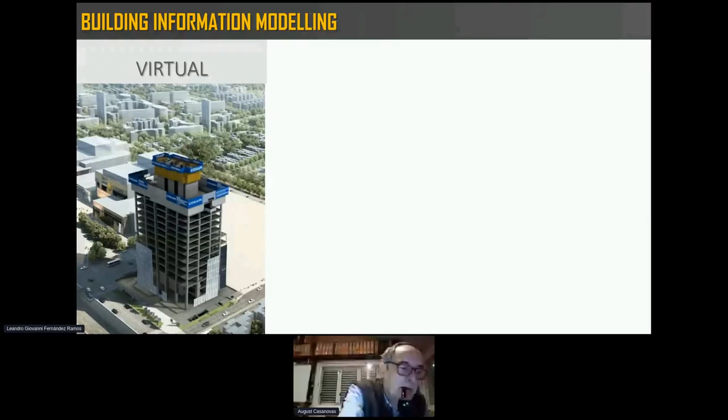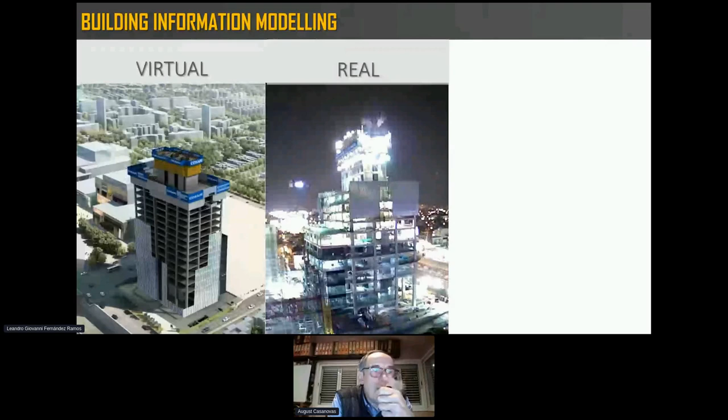However, today we already have a construction industry prototype, a digital prototype, in which we can make mistakes and then build the real building. It is very important. It's such a difference since some years ago.

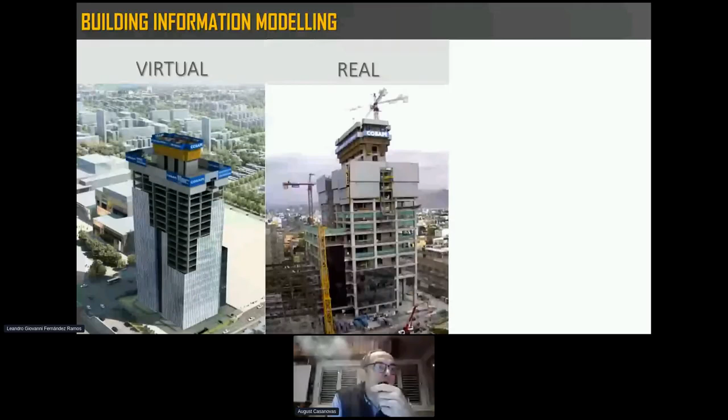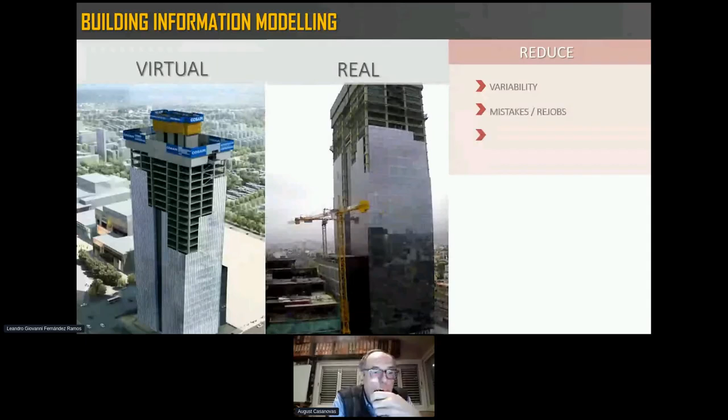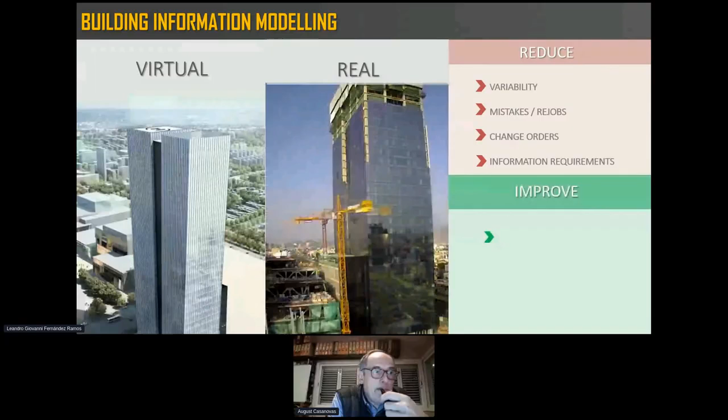With the goals of reducing variability, mistakes and rework, change orders, information requirements, that would only be a problem in the design phase, and obviously improve the multidisciplinary collaboration, our productivity, and optimize the win-win relations.

BIM is made up of three acronyms: B for building, I for information, and M for modeling. Although we would like to see them independently, in reality, the multiplication of their effects is what allows us to achieve BIM objectives. Now, we need to know what BIM is. But first, I should say that in general, there is no international consensus about what BIM is.

We're going to say that BIM is a technology that allows the digital representation, but what does it allow us to represent digitally? The physical and functional characteristics of a project during its design, construction, and facility management. Okay? Facilitating the acquisition, integration, review, processing, simulation, visualization, and automation of project information. And I wish we can go acronym by acronym, reviewing the concepts.

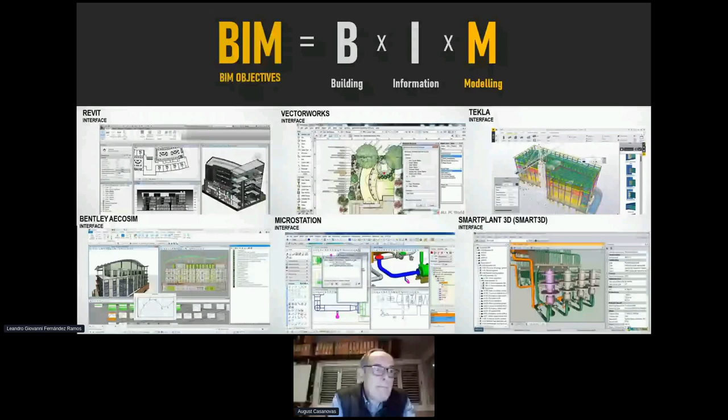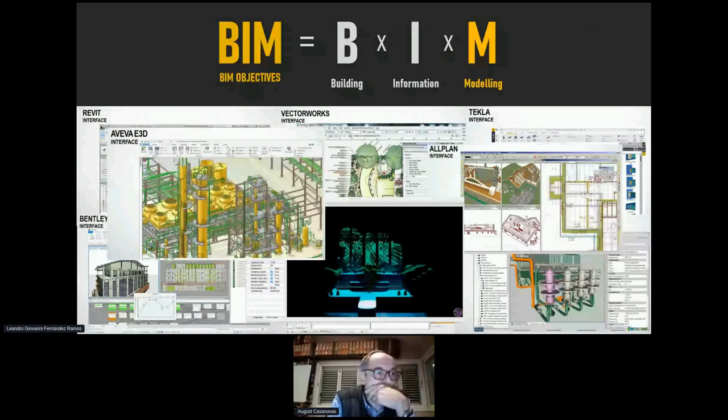First, let's talk about the M for modeling. Modeling is about the tools that allow us to digitize the project. There is no one type of BIM software. There are many for any type of project, and generally, BIM is associated only with Revit, which is a serious mistake. There are a lot of kinds of BIM software, and we need to understand what we want to do to apply or try to implement BIM. Now, I would like to talk about the B of building.

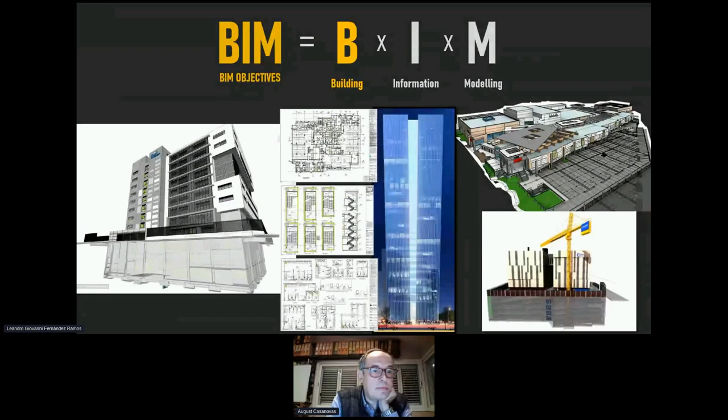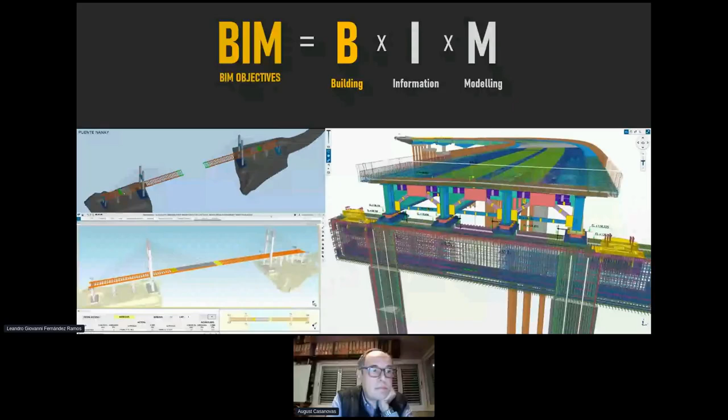Generally, we only associate building with offices, malls, hospitals, but that is just one type of project where we can apply BIM. Also, we can apply BIM in industrial plants, in mining projects, where model development is quite advanced. Also, roads infrastructure projects. Bridges. This, for example, is the Nanay bridge in northern Peru, a bridge that we finished 1 month ago, and in which BIM was implemented. Projects in general, such as dams.

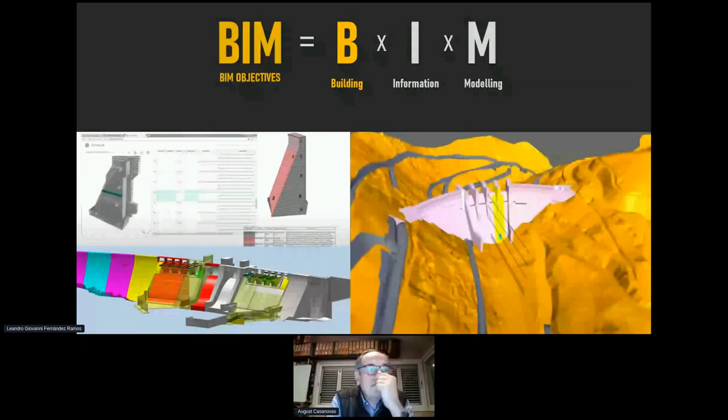And finally, we come to the most important letter of BIM, the I. The I for information. Information is the new electricity. Those who can master their information are one step ahead of the rest. That is fact. We can say that BIM is basically a kind of information technology associated with the world of construction, from which we have two types of information.

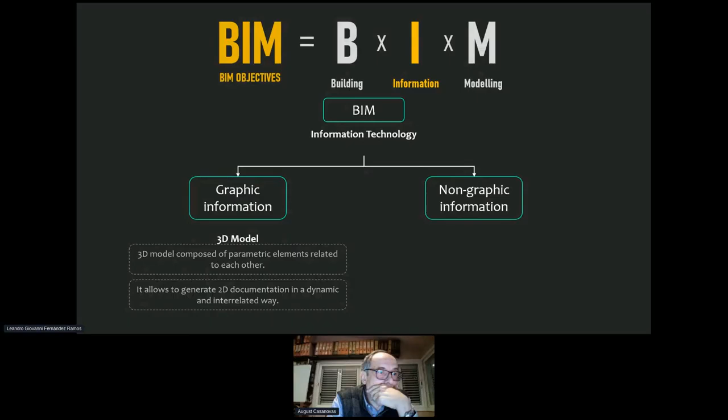The graphic information related to the 3D model and the visible objects, and the most important, non-graphic information linked to the data, which allows managing the most relevant information of the project. All these transform BIM into a graphical database that is structured, centralized, and integrated.

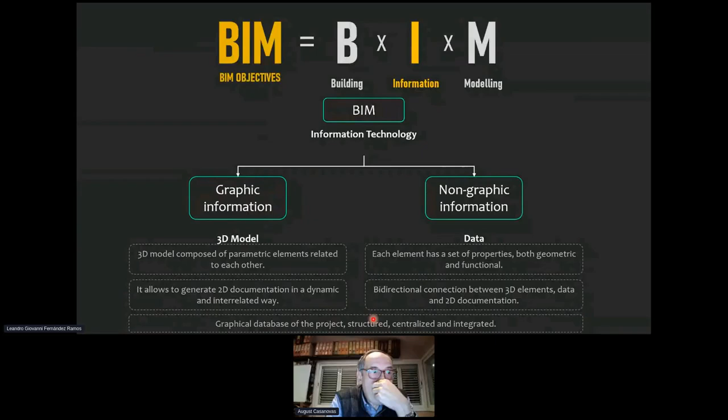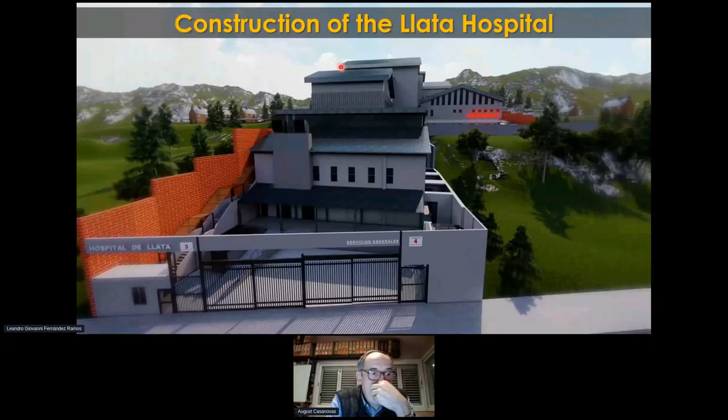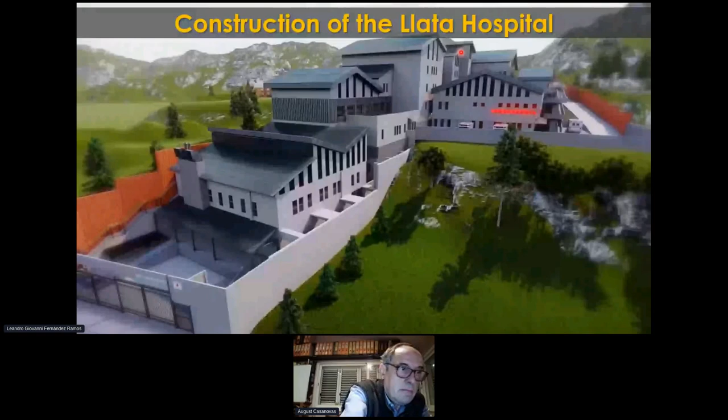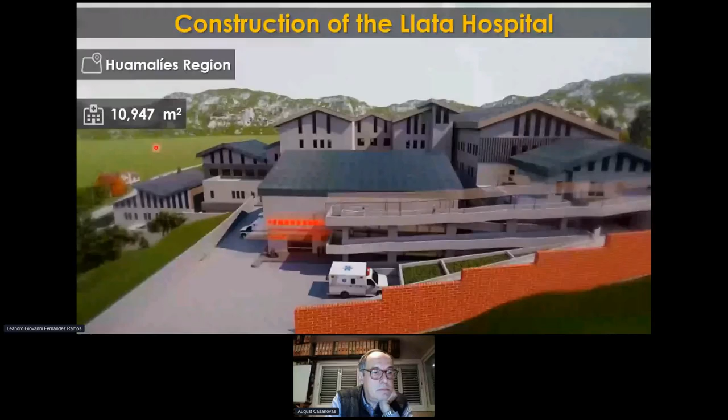Now, I would like to talk about the project that I mentioned at the beginning, since it will make the presentation much more practical. This is the Llata Hospital, a hospital located in the Huamalíes region in Peru. The hospital consists of a constructed area of 10,947 square meters, 43 beds, whose construction and equipment must be built in 22 months.

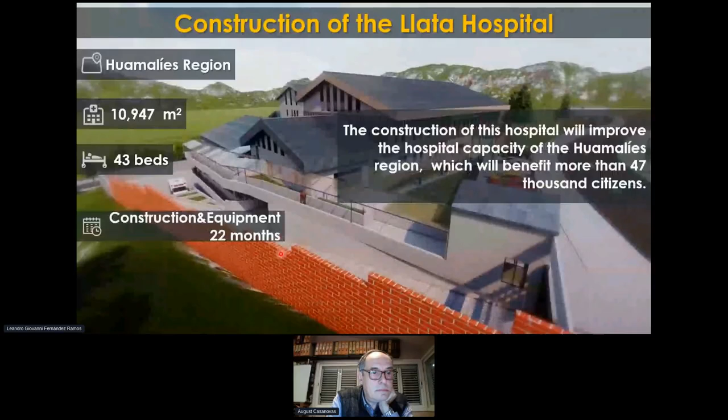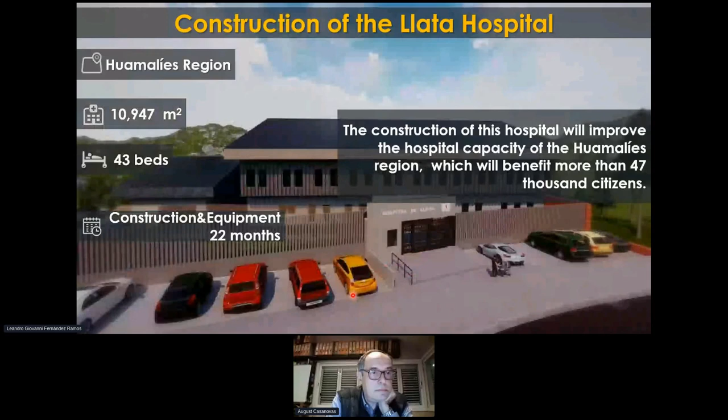The construction of the hospital will improve the hospital capacity of the Huamalíes region, which will benefit more than 47,000 citizens, which is very important at this time. All of this will help us explain the BIM work framework of this project. First, all the implementation must start from an objective, obviously. In this case, the client's objective and the project's objective. My client's objective is to deliver the Llata Hospital to improve the hospital capacity of the Huamalíes province that will benefit more than 47,000 citizens.

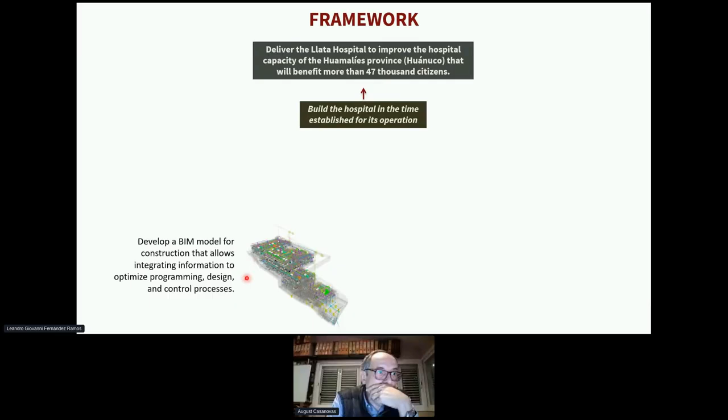Then, the objective of the project, which is to build the hospital in the time established for its operation, for which, for BIM, we must generate a construction model that allows integrating information to optimize the programming, design, and control process. Lean will allow us to add value and reduce waste in a traditional process, to optimize the traditional planning, design, and control processes based on disintegrated information that we had at the beginning of the project.

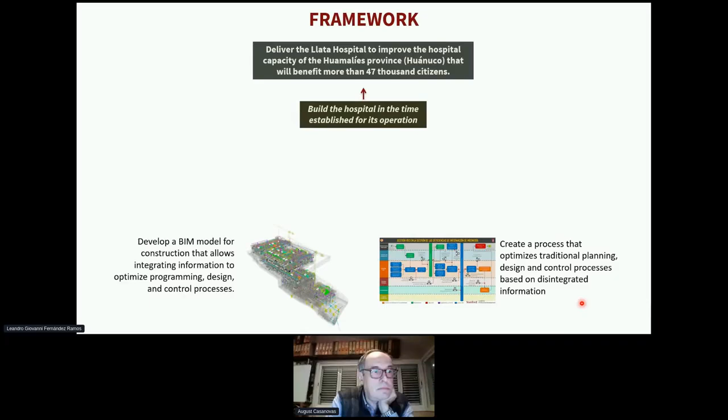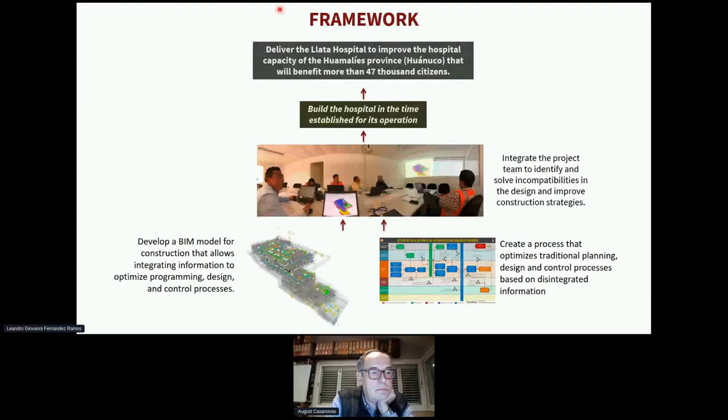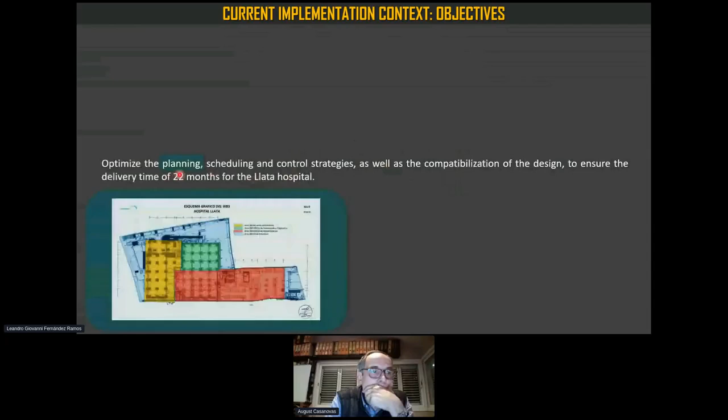This, added to integrated concurrent engineering, will allow us to integrate the project team to identify and solve incompatibilities in the design and improve construction strategies. And in this way, achieve the objective set. My objectives aligned to BIM are to optimize the planning, scheduling, and control strategies, as well as the compatibilization of the design to ensure the delivery time of 22 months for the Llata Hospital.

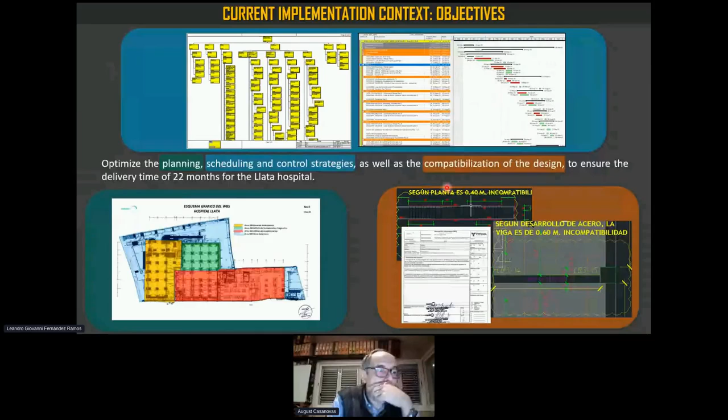Disintegration of information is a common and terrible problem in construction projects and very risky in hospital projects. But it is exactly a good opportunity to show the benefits of BIM. In this way, we need to know the context prior to the implementation. At the beginning of the implementation, we had a process of transfer of knowledge to the project team to be able to explain what BIM is, what we want about Lean and how it works. Obviously, we need a lot of training for the people.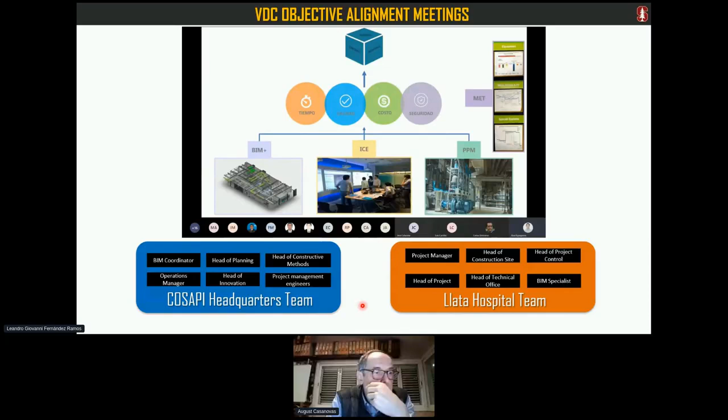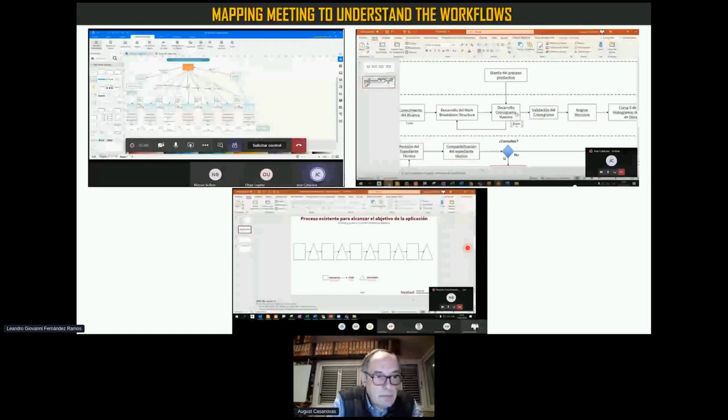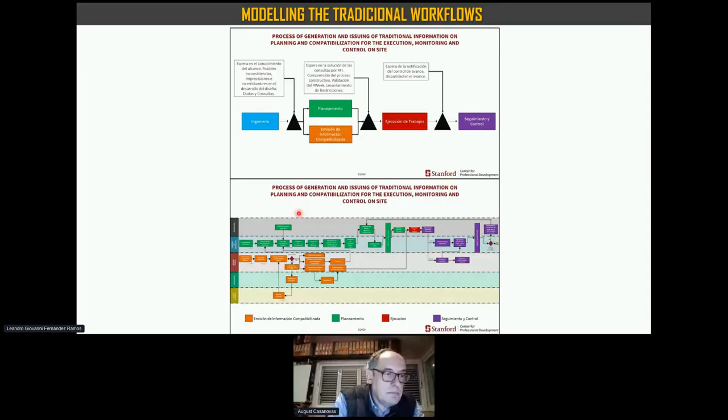From this, we had meetings with the project team to map the traditional process that they planned to carry out. And it is interesting how among themselves, they didn't know what the other areas were doing, what the other departments were doing. They didn't know. In these meetings, we modeled the traditional integrated process to be able to identify any variability.

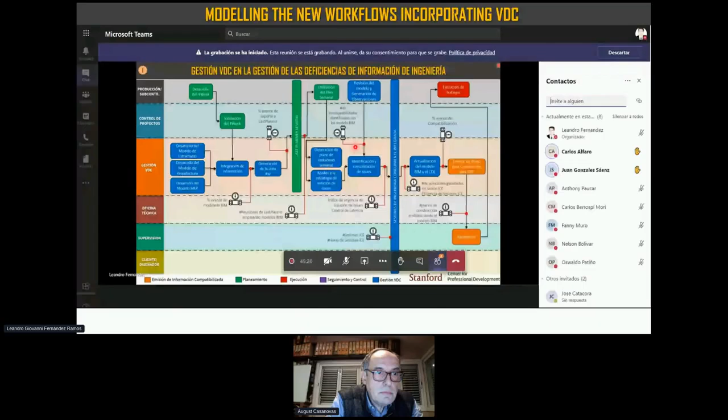We had meetings with the project teams to carry out a new integrated process where BIM processes were integrated to optimize the previous flow, where we also defined control points in this flow. We can see it. We put some points in the flow to try to control and make a measure about it.

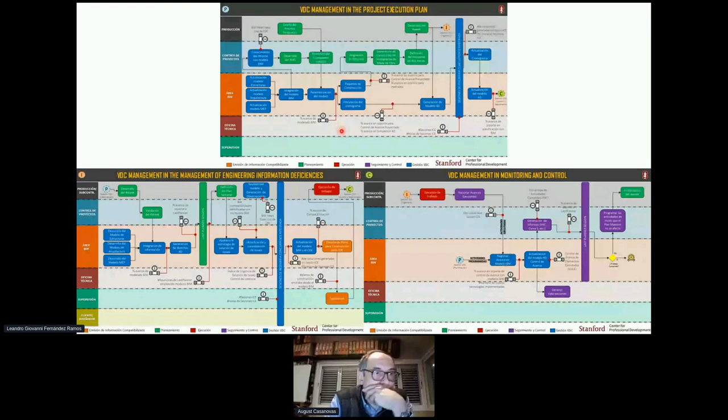In this way, we were able to consolidate the flow to develop the planning and scheduling, the compatibility of the design, and the control of the project execution. It is important to consider that we must not only model the product, we must also model the process. The process is very important if we want to implement BIM. The process is the most important way to understand how we can make a good model to help the project. It is a very important thing.

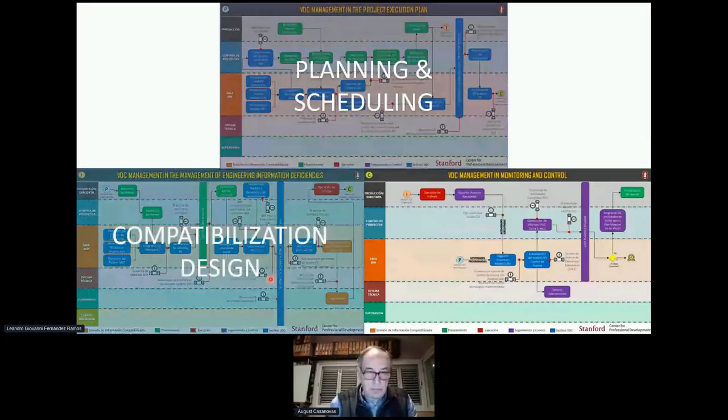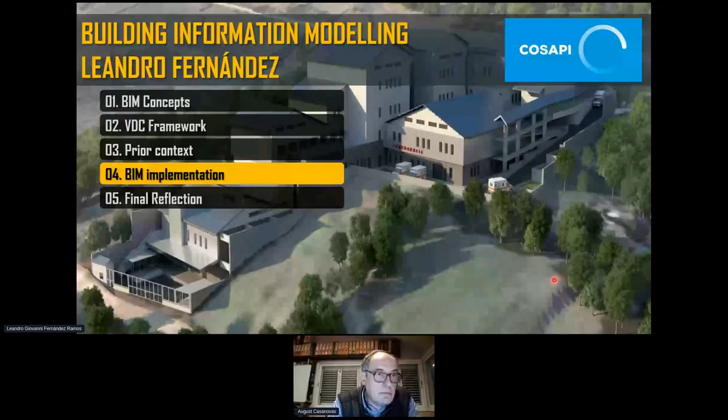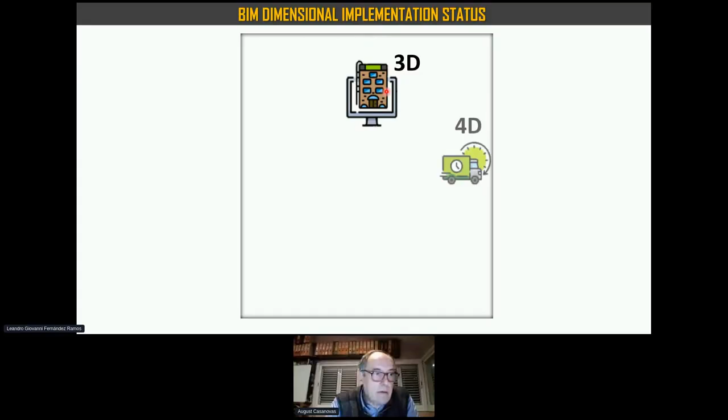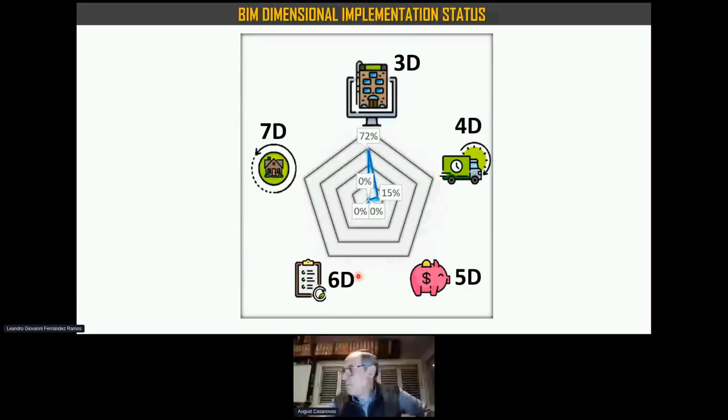Planning, scheduling, compatibilization design, execution plan. From this, we start with the BIM implementation process where we apply different BIM uses, for which we need a starting point to understand the scope that the BIM model would have in the project. So we work with the 7 dimensions of BIM: 3D, 4D, 5D, 6D, 7D, just to measure the implementation of each dimension, where we take different BIM uses for 3D to take advantage of the information of the model and solve problems in the design, and in 4D to optimize the construction stages.

We modeled all hospital disciplines. This was a difficult job because in a hospital we have a great variety of main and secondary networks, especially in the main corridors. And this project was designed in CAD information, so the mistakes and the issues were too many.

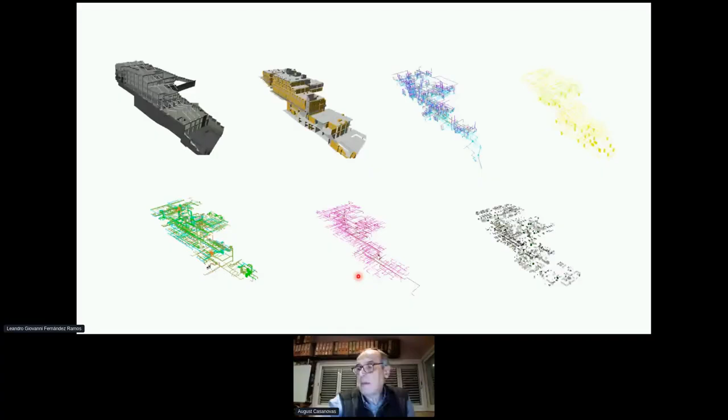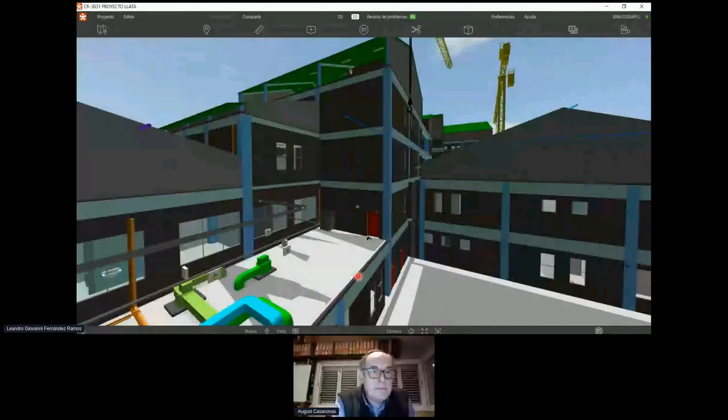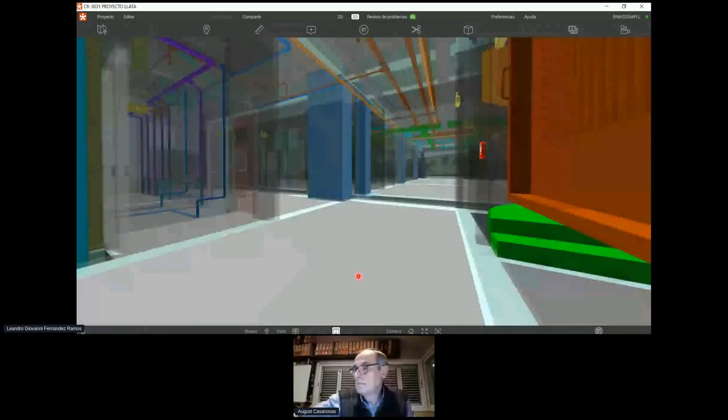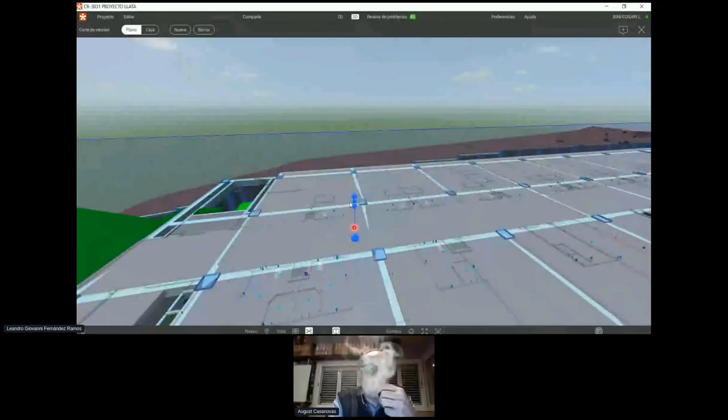Then we also integrated it in a single model and shared it through a common data environment called Revizto. It is a useful tool which allows us to have the latest version of the project with access for everyone. And also it works in the cloud. And a very important thing for me is that it is easy to use for anyone. So if we want to improve the learning curve, we need to look for an easy-to-use platform. Obviously, we want to improve the BIM implementation.

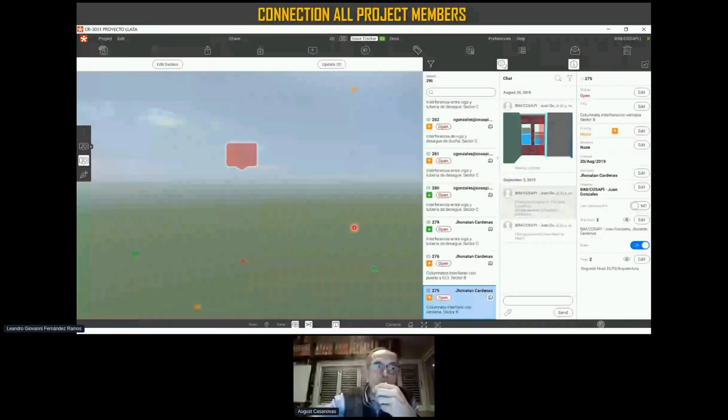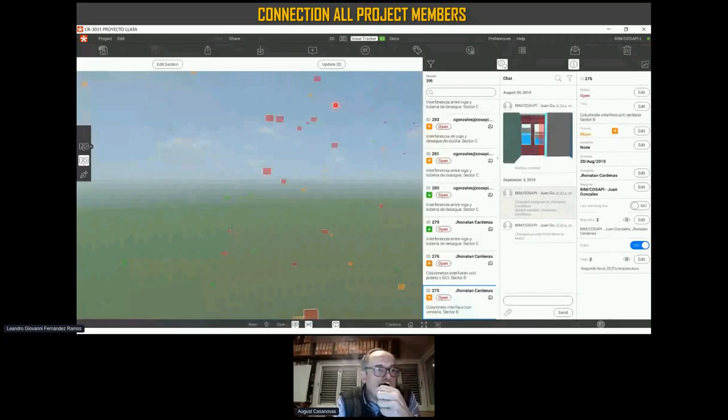And the main benefit of this kind of platform is not only coordination, but also collaboration. So it allows us to share issues in the cloud to be able to solve them. Since the success of this kind of tool is that the team members participate and use it, we decided to monitor their use. And as I told you a moment ago, it is easy to use and it is an important thing.

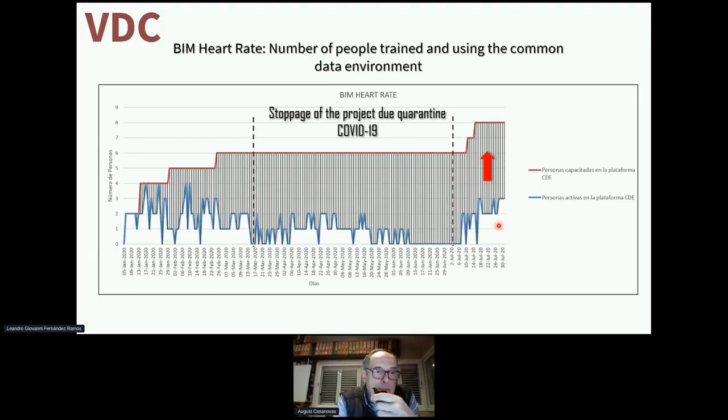These graphs allow us to know the interaction that people are having with these tools, in addition to the people trained in it. That is why I decided to call it BIM heart rate, because it works as a way to see how alive BIM is in the project, ideally keeping the rate high. In this case, the project started with a good heart rate, but in March, we had a stoppage due to the quarantine for the coronavirus, which caused the heart rate to drop to 0, but then it's coming back to life. It allows us to understand how the people use the platform, because it means that the people are looking at the BIM model.

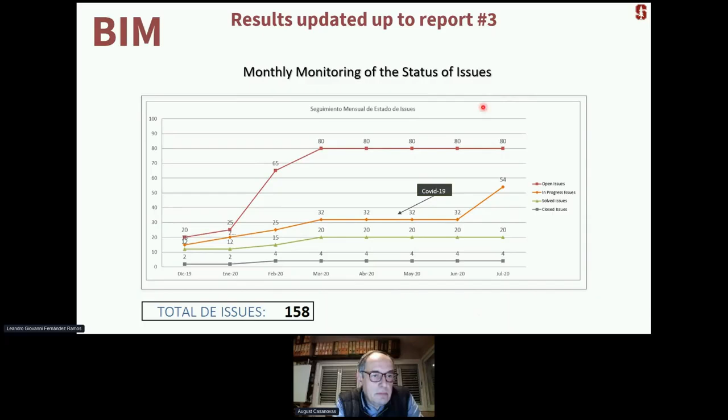Of course, since we must manage the issues, we must measure their solution. For example, this graph shows the number of issues, if they are open, in progress, solved, or closed. It allows us to measure and understand how the information is working, and also to know the status of issues according, for example, to the level of the building, to be able to prioritize their solutions.

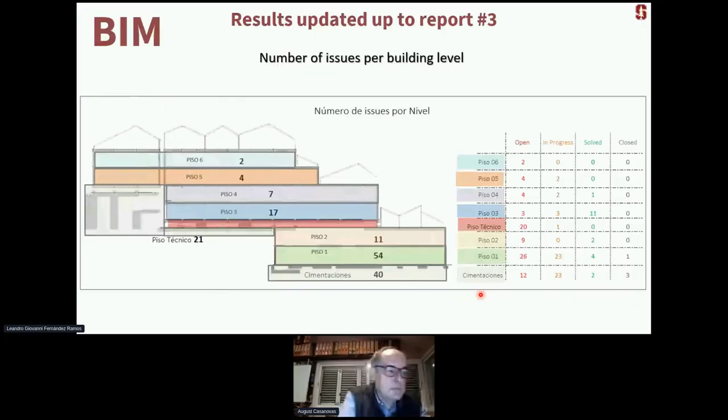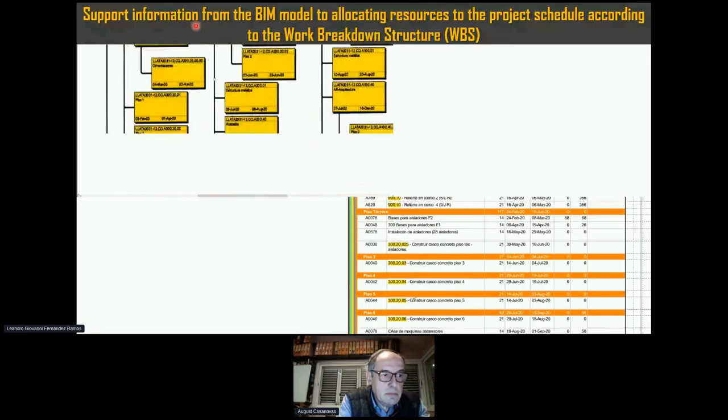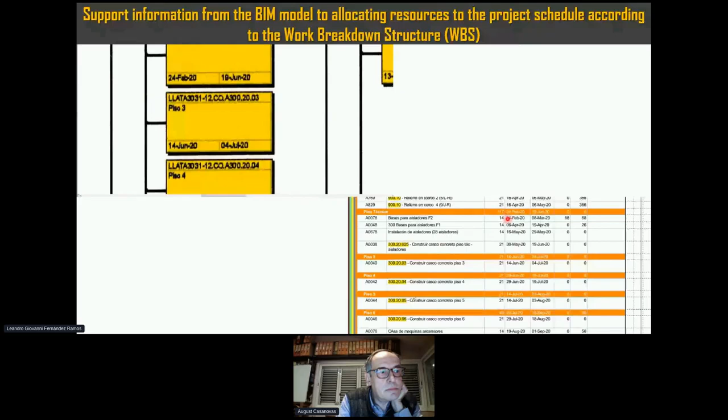Also, one of the most important applications was the support information from the BIM model for allocating resources to the project schedule according to the work breakdown structure. Because on the one hand, we have this work breakdown structure in PDF, and on the other hand, we have the schedule information aligned to the WBS information in a PDF too, created in Primavera P6. For the structural discipline, for example, we decided to integrate this information into the BIM model, both to work each of the work areas, as well as the construction packages.

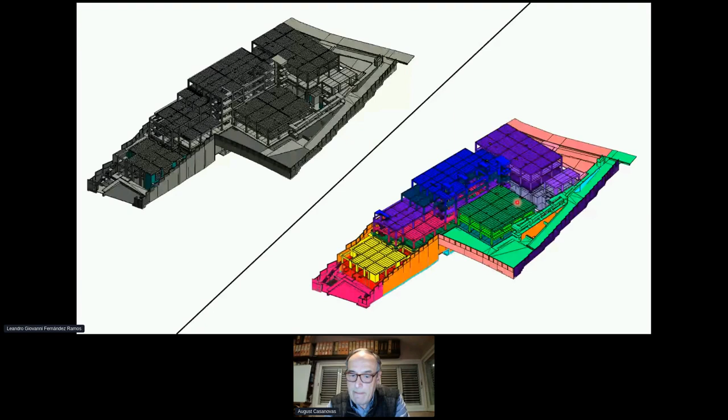So we can see how we can parameterize all the areas to know the packages of construction. We code each element to form build packages. And it was possible to know each one of the construction packages assigned according to its code in the work breakdown structure.

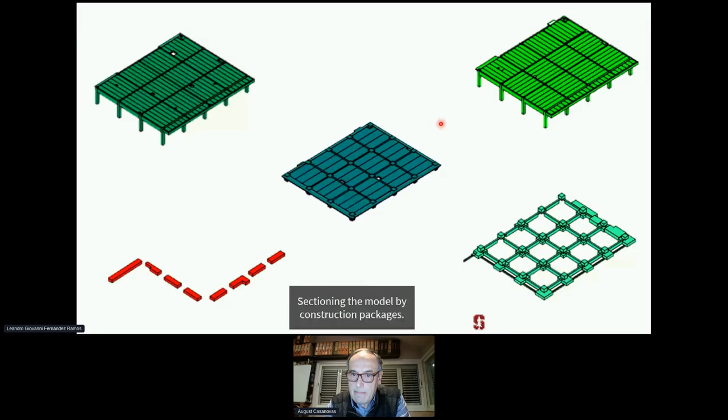This allows us to identify some inconsistencies and lack of information of some elements not located correctly in the WBS. In fact, the project control manager didn't detail it correctly because the information in CAD doesn't allow him to know the detail of the scope with precision. For example, here the retaining walls were not located in a package. We discovered this, and together we developed a suitable way to locate it in the packages.

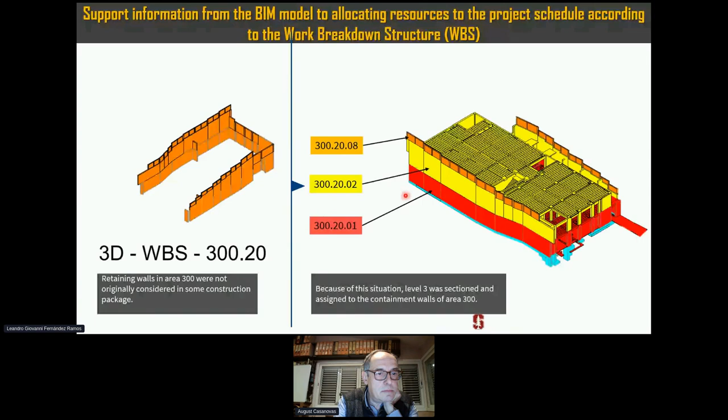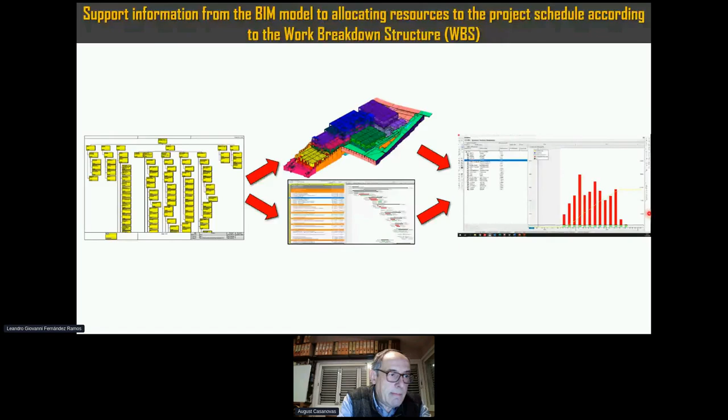Because of this information added to the BIM model and the schedule, resources could be allocated to the schedule to obtain more accurate histograms. This is how we create these summary sheets, from which we can also obtain quantities. And what can we see here on the side?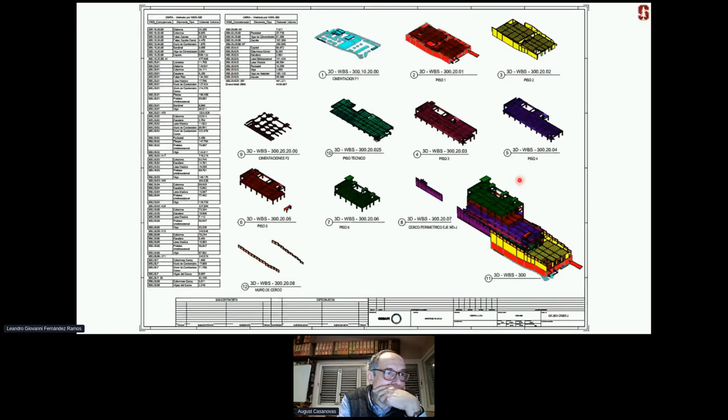In fact, in an interview with Jose Catacora, the project control manager, he told us the following. This progress we have had with BIM regarding quantities has been very interesting. In other projects, I have suffered a lot to obtain this information. For other projects, I prorated it, only with percentages to have an approximate idea of the scope. I would like to repeat it. An approximate idea of the scope, and to be able to control the progress process.

Now that we have BIM, it motivates us to promote our work more. It was something that I didn't even remotely think we would have in the hospital. It is very important to us that what we finally implemented is useful to others.

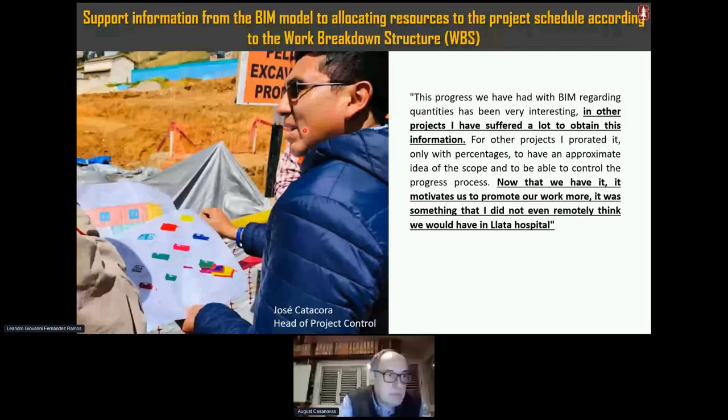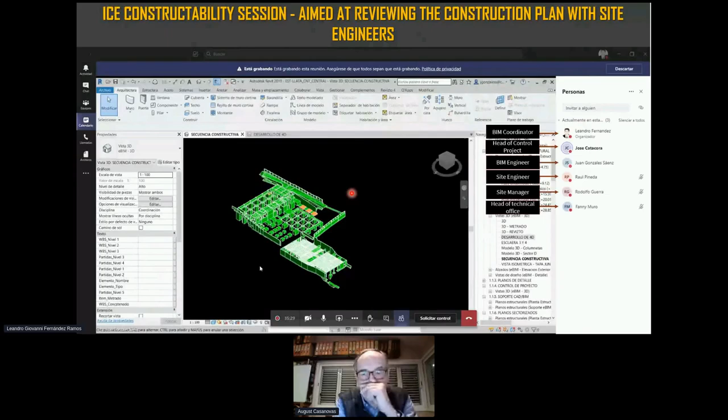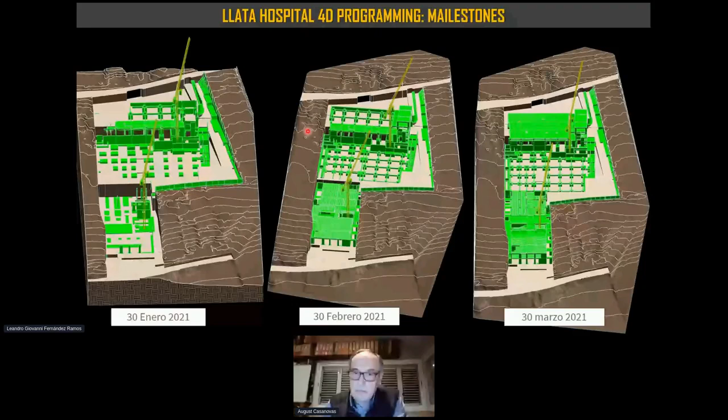We also worked on improving planning. We had integrated concurrent engineering sessions together with the site engineers. We promoted better attack strategies for the project, from which the milestones reflected in the BIM model came out. For each month, January, February, March, with the aim that everyone understands what we are going to build, even the masons, everyone. April, May, June. This also allows us to generate the simulation.

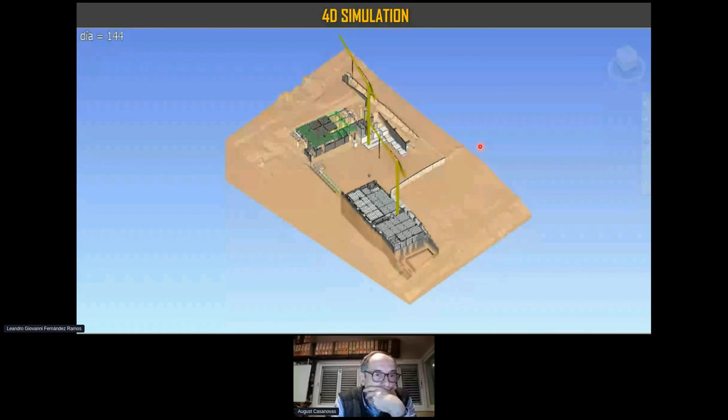Also, it helps us, for example, for the last planner sessions; it is useful for the site teams, for everyone. One of the most relevant things was to realize that it was necessary by February to accelerate the construction of this roof, because that time is the one with the highest rainfall in Huamalíes, and it wouldn't allow us to work in that area. So we checked the possibility to accelerate the roof process of this area in such a way as to prevent rains from stopping work. And we made it.

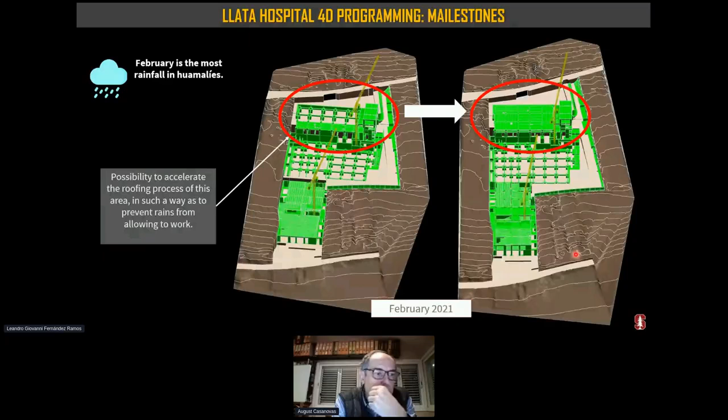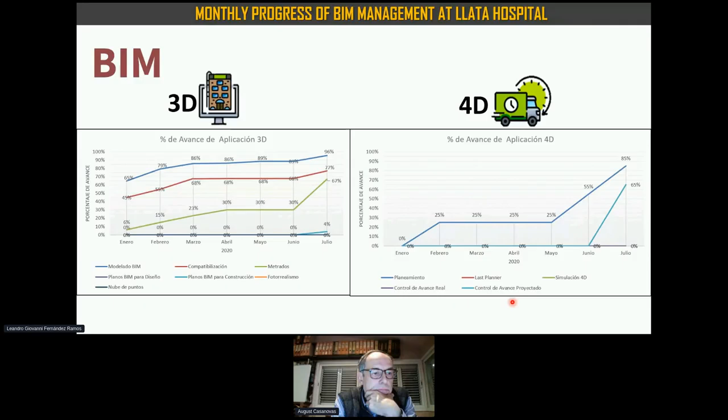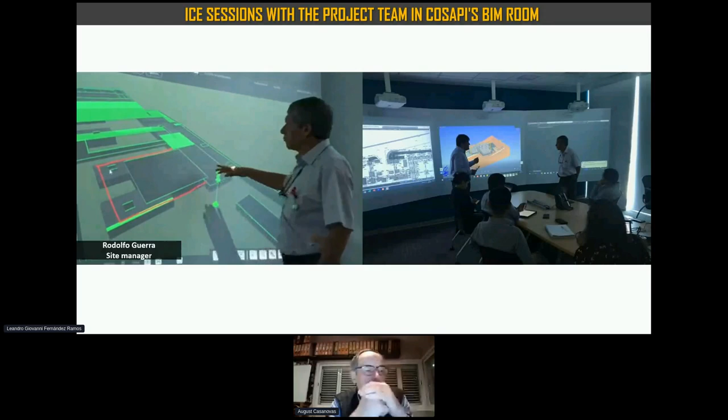But obviously now, in this new reality, we have moved the ICE session to the digital world. It still has the same powerful concept of collaborating with a team to solve all the issues. We have sessions with the design members, the contractor members, and also the BIM team to try to find different ways to solve the issues or the problems that we have.

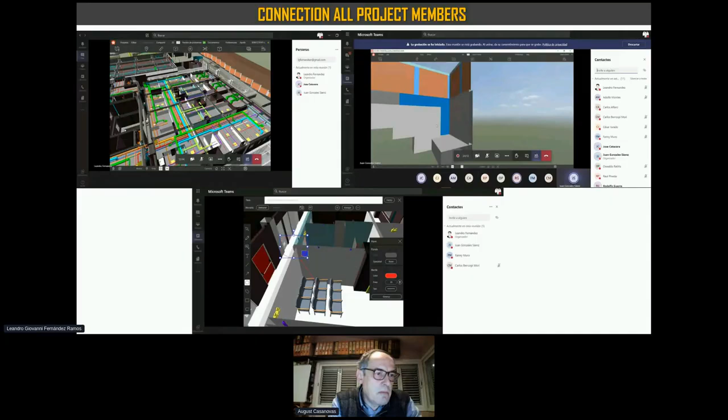Leandro, time. Oh, sorry. Okay. Can you hear me? Sorry. Yeah. Okay. Your final conclusion, please. Yes, of course. Well, maybe just to finish it.

Finally, I would like to end my presentation with a phrase that is consistent with my presentation, but above all, it has to do with the spirit of BIM. One person goes fast, but a team goes farther. It is important to understand that if we work as a team, we will be able to carry the project forward.